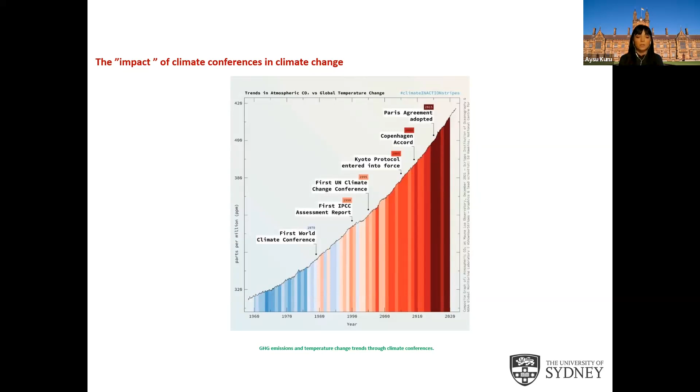The climate conferences held since 1979 seem not to have helped that much, including the Paris Agreement, in which many countries agreed to limit global warming to 2 degrees Celsius.

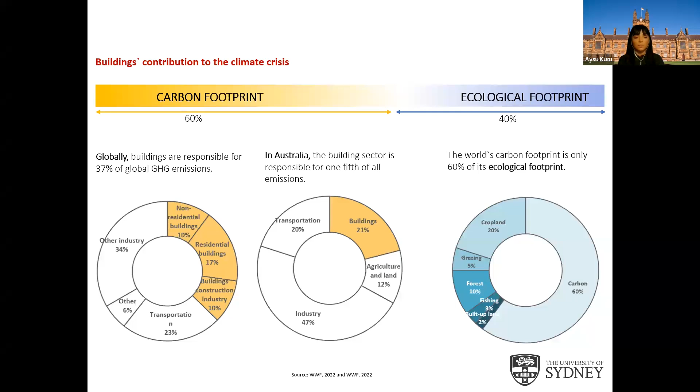Australia is identified as one of the most vulnerable developed nations to climate change. There is increasing evidence of climate change interacting with underlying natural variability and resulting in substantial increases in the frequency and intensity of extreme weather events, as we all have experienced in Australia.

However, there is an opportunity rising from this problem, and that is the transition to a net zero carbon economy. Australia has the capacity in terms of technology and available land to not only transition to, but become a world leader in a zero carbon economy.

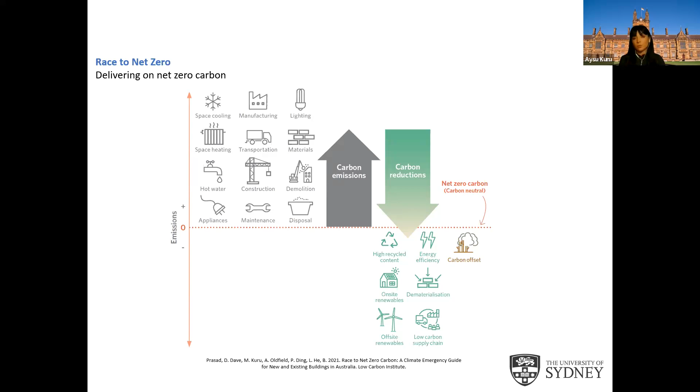We mapped the potential of carbon reducing strategies in various building types and the potential for generating renewable energy to offset operational carbon to reach net zero operational carbon performance. We set a net zero target for 2030 in alignment with the urgency that climate change requires.

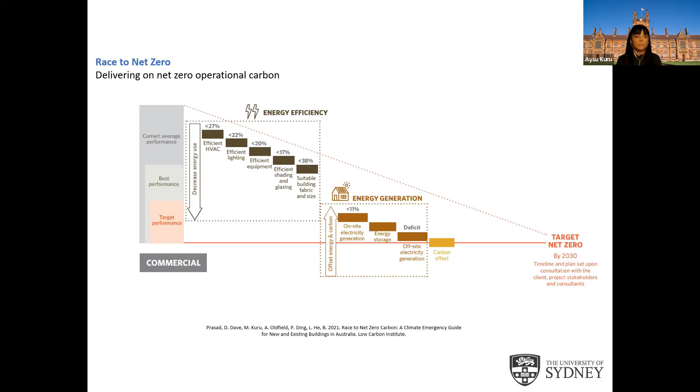First, do not build, and if that's not an option, adaptive reuse may be one. Second, build less and dematerialize. Third, build smarter and optimize. Fourth, use low carbon supply chains.

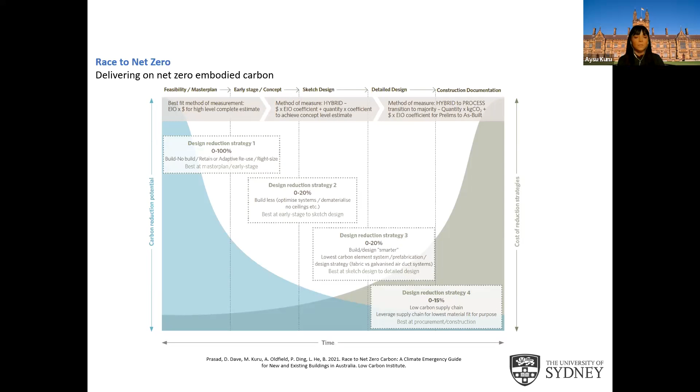Based on our calculations for the Australian building sector to reach net zero by 2050, operational carbon can be net zero by 2030 and embodied carbon by 2040 for new buildings. Existing buildings can achieve net zero carbon performance by 2050 altogether.

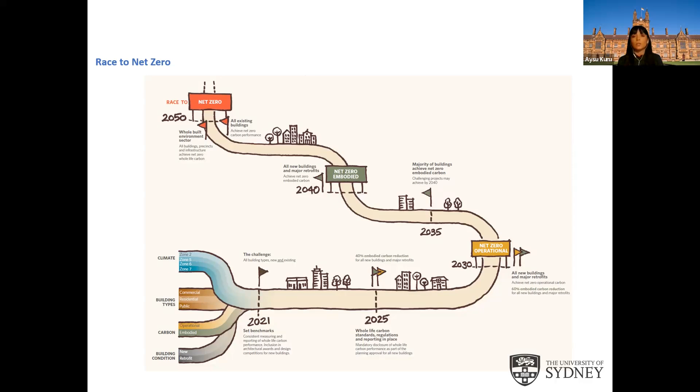Now I'd like to move on to a second research-driven project called Ecoactive Building Envelopes. Ecoactive building envelopes is an innovative concept of designing building envelopes that give back to the natural ecosystems that they're a part of. So they do not only offset their emissions, but they give more than they take from the environment. As such, they're also named negative emission technologies.

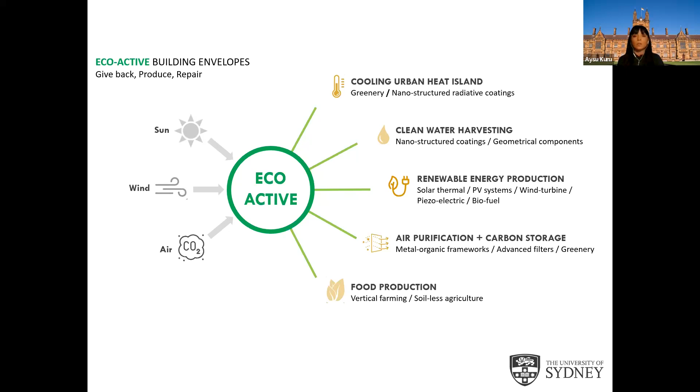In particular, the nanotechnologies included in the one-to-one scale prototype are atmospheric carbon capture, algae bioreactors, and nanotech photovoltaics.

The carbon capture technology captures carbon from the air. This is an important technology because it helps to get rid of the carbon dioxide that is already in the atmosphere. This is known as carbon sequestration that trees do, but with carbon capturing nanotech, we can do the same in a rapid fashion in support of living things absorbing carbon dioxide. Think of this as making buildings carbon sinks.

We couple the carbon capturing nanotech in our prototype with an algae bioreactor. An algae bioreactor is essentially a transparent system that can be implemented on the facade. Algae is a living system and it needs carbon dioxide to survive. The carbon captured by the nanotech in our prototype is then given to the algae to be turned into oxygen by the algae. So the prototype is a negative emission closed loop system.

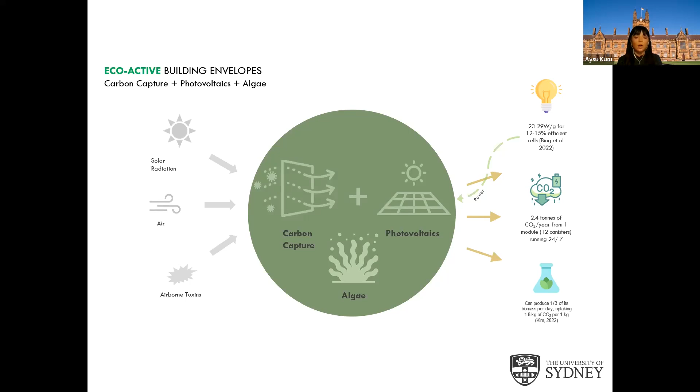There also is a photovoltaic system helping generate green electricity within the prototype to offset the energy used for the carbon capturing nanotech technology.

Well, that's enough talking technical. Now we'll zoom out and talk about climate action to tackle climate change.

The Australian and state governments are on track to reach net zero emissions by 2050. Some states have already achieved this, and some have more ambitious targets than the federal government. But what matters is that Australia is aware and committing to make an impact.

We've talked a bit about climate conferences, but not mentioned the biodiversity conference. Similar to the climate change Conference of Parties, which stands for COP, there is the Biodiversity Conference of Parties, or Biodiversity COP. The last one was held in December 2022 with a significant outcome, something like the Paris Agreement of Biodiversity, at COP15.

More than 190 countries committed to reverse nature destruction by 2030. In doing so, they committed to protect 30% of land globally. Australia committed to this pledge too, not necessarily protecting land at home, but globally altogether. Hopefully this will be followed by national action to protect land at home too.

Where I work, the University of Sydney is committed to take action on climate as well. I find it motivating to give you some insight into the University of Sydney sustainability strategy in the hopes that it can inspire other organisations like where you may be practicing.

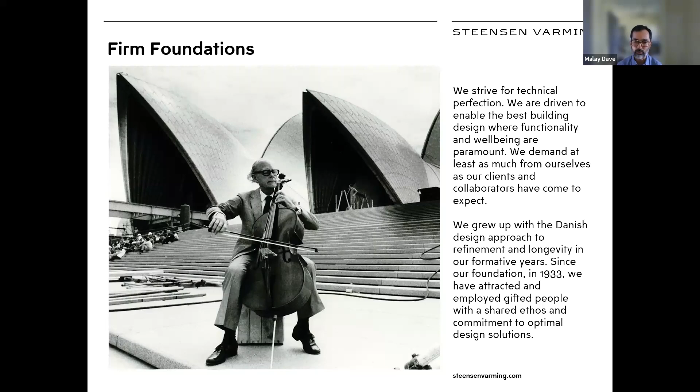In terms of environmental sustainability and commitment to climate and society, we have been early adopters and early signatories of the United Nations Global Compact. This includes 10 principles divided into 4 key categories, covering human rights, labor, environment, and anti-corruption.

We have expanded our attempt for positive impact beyond this. Recently, we have been assessed on the B Corp assessment. B Corp stands for Benefit Corporation, where organizations' actions in their day-to-day operation provide beneficial contribution to the environment and society at large.

We were very pleased to find that our overall B Impact score was 104. 50 is the median score for ordinary businesses, and 80 is the minimum score to be eligible for B Corp certification. This was our first attempt, and we will continue to work on enhancing and expanding our reach in 5 key categories, which are rigorously assessed and independently verified through B Corporation. These 5 categories are governance, workers, community, environment, and customers.

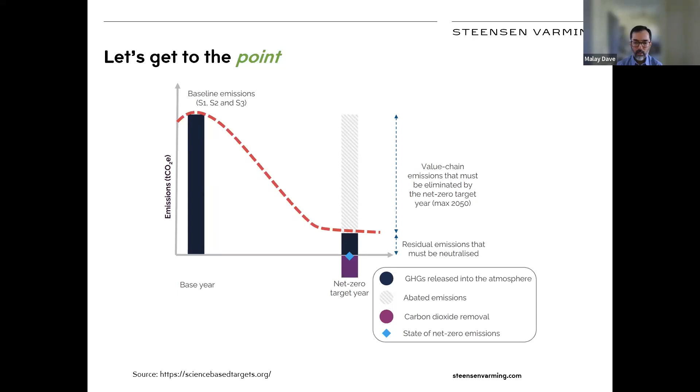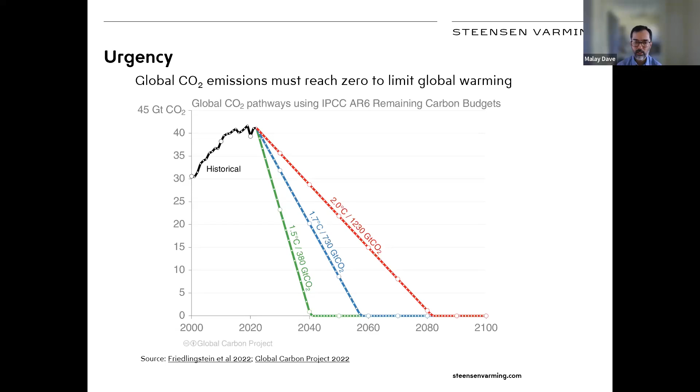This is based on our current understanding. The Global Carbon Project recently released their paper on the remaining carbon budget, based on the latest IPCC report. They demonstrate that we have 3 distinct pathways possible for that reduction to occur. If we were to stick with 1.5 degrees reduction, as per the Paris Climate Agreement, that reduction may need to be substantially more rapid and acute than previously understood. This presents an enormous challenge, but something we have the capacity and technology to deal with right now.

I would like to start the second part of my presentation in this context with a question raised by one master long time ago. Le Corbusier asked, "It is a question of building which is at the root of the social unrest of today, architecture or revolution?" If the master was today to see the climate emergency we are dealing with, he might say it is a question of building which is at the root of the climate emergency today. What do we want to produce, architecture or revolution?

Leading organizations, whether practitioners or industry bodies, are taking a mission approach because of that need for revolution. This is an example of the Green Star Buildings tool from Australia, which has taken a very robust approach for rapid reduction in carbon emission through the building sector. This is the climate positive pathway released as part of the new Green Star Buildings tool.

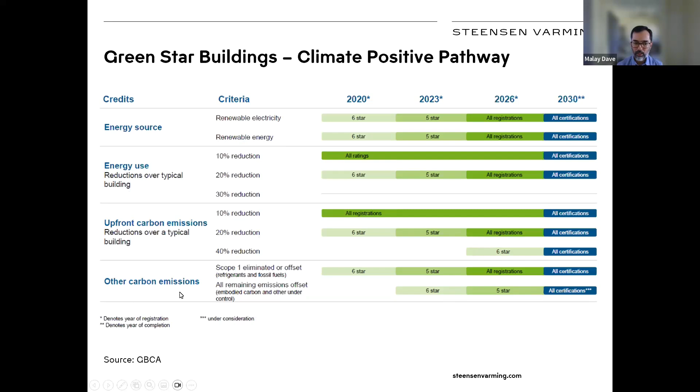This demonstrates the gradual ratcheting up of stringency levels for Australian buildings. From 2020 up to 2030, increasingly at every 3 years, buildings are required to improve their performance through minimum performance stringency increases across 4 key categories essential for the climate positive pathway: energy source, energy use, upfront carbon emissions, and other carbon emissions not captured anywhere else.

Presenting one case study that we are working on right now, which has also taken a similar approach. This is the Melbourne Arts Precinct transformation project. This is the Yarra River, and on the south side is the Melbourne Arts Precinct. There are existing buildings: Hamer Hall, the Theatres Building, and the National Gallery of Victoria International. There is also a proposed building we are working on in parallel, National Gallery of Victoria Contemporary, or NGVC.

It is very interesting to work on a project that has scope for both a precinct and individual buildings. It provides enormous opportunity for achieving sustainability and high performance across different services and categories. It also presents several challenges of interface and complexity, how to deal with performance assessment and delivering that high performance.

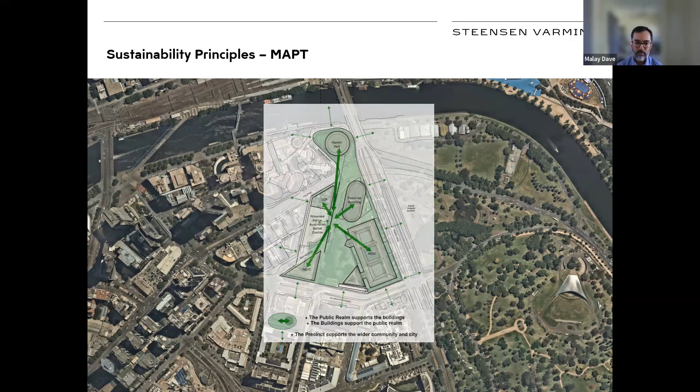What we started with was setting up an overarching sustainability strategy matrix. Across 10 different categories, we looked at various strategies, and as the project progresses through different stages, what strategies would apply and why. We considered sustainability management, site and environment, planning and microclimate, health and well-being, energy, water demand, transport, materials and waste, community and economy, and smart tech and infrastructure.

We looked at high-level aspirations for the entire precinct and what that meant in terms of strategies. What would we consider at concept and master plan level or detailed design level? Infrastructure versus building design strategies, as well as after construction completion, what would be the ongoing strategies for future phases for operation and post-occupancy?

This shows that sustainability and climate emergency were taken quite seriously and applied quite comprehensively. Without going into much detail on all the different categories, I would like to focus on the key aspiration of the project, which is aiming for zero.

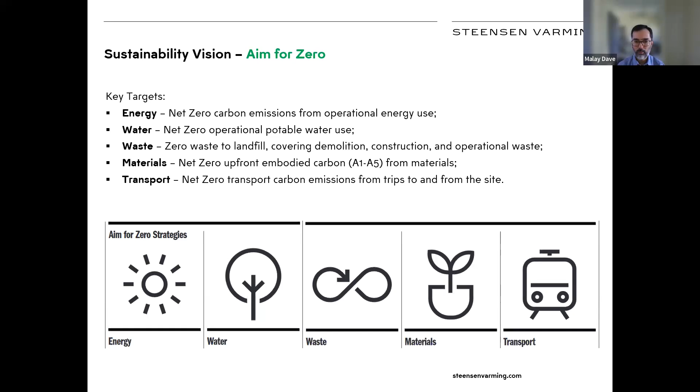5 categories were tackled in this aspiration: net zero carbon emissions from operational energy use; net zero operational water demand, reduction in terms of potable water; waste reduction to zero, or waste diversion from landfill, which would include demolition, construction, and operational waste. In terms of materials, in addition to responsible materials specification and environmental or human toxicity issues, we strongly focused on embodied carbon through A1 to A5 scope, which is upfront embodied carbon from materials; and transport, in terms of net zero transport emissions from trips to and from this site.

An optimized network would be critical for a project like this, which has to deal with both precinct demands as well as individual building demands. A similar hierarchical approach was adopted for waste, water, transport, and a circular economy approach for material selection and construction methodology application.

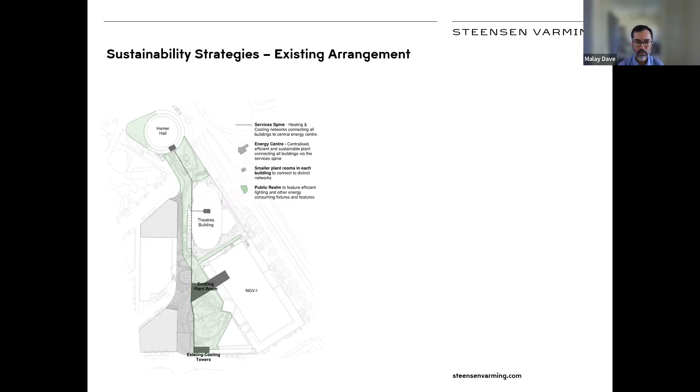The precinct design is being led by Hassell and a team of expert consultants, and we are leading, among other services, sustainability as well.

What was proposed was a centralized system instead of a decentralized system for various benefits. Key benefits were energy sharing, improved redundancy and resilience of the entire system, possibility of future upgrades and maintenance, improving sustainability of the whole site as well as individual buildings in one integrated system, and the possibility of future improvement as well as eligibility of any grants available for renewable and district energy implementation.

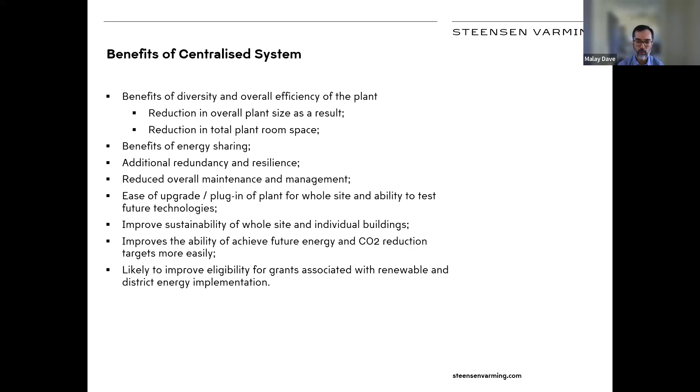What was considered was an integrated resource management, considering both energy and waste and water. Here we are looking at two key resources, energy and water. What will be available on site and what will be imported was considered. Vertically, you can see there are categories of generation mechanisms that leverage this resource availability. There would be passive opportunities.

What products would be required and processes will be engaged, and what would be the eventual output through each of those categories, and what would be the interaction across all these different systems, and how that integration will need to be included in design decision making, was considered as a team.

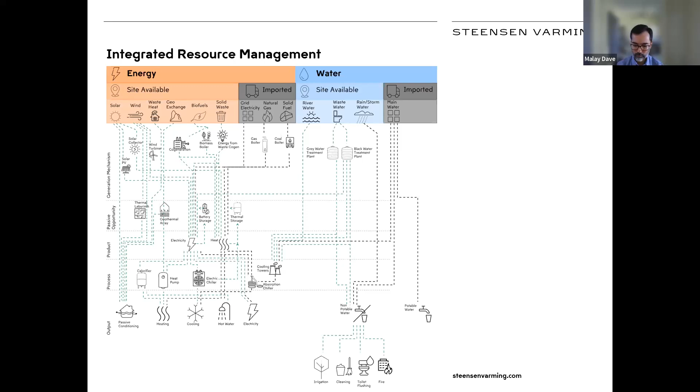There are ESG performance levels and priorities considered, both in terms of resource efficiency of energy, water, and waste. Benefits to the community and ecology at large was considered. Resilience and redundancy aspects were considered as well. And in terms of practicality, cost, payback time, spatial implementation, and of course, disruption to a prominent site like this was also considered. Each strategy was assessed and given a score, and then that helped us compare all strategies with each other.

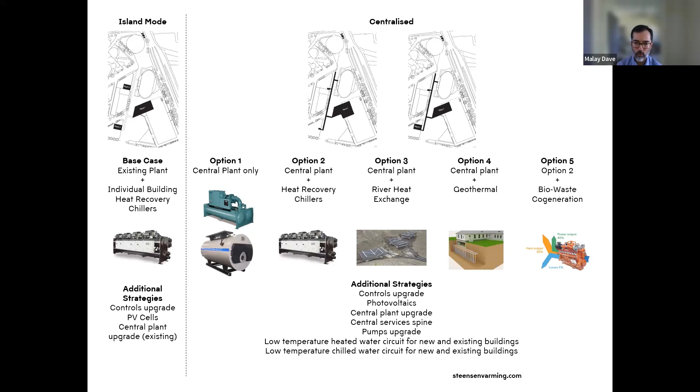To the right-hand side, we see five different options, and each of those options were considered on those criteria previously mentioned. Through that assessment, in that early design stage, we were able to demonstrate that option five was able to provide significant benefit. Although this is a snapshot of a work in progress, and further considerations subsequently were taken into consideration, and the design process is still ongoing.

However, this shows the method through which a decision-making process can be undertaken on a complex project like this. What was also considered was each option was compared based on four different other categories. Energy consumption for heating and cooling was compared for all those six options, or five options compared with one base case. Resultant carbon emissions from cooling and heating system was also compared. Water consumption for cooling was compared, and the net present value over 30 years.

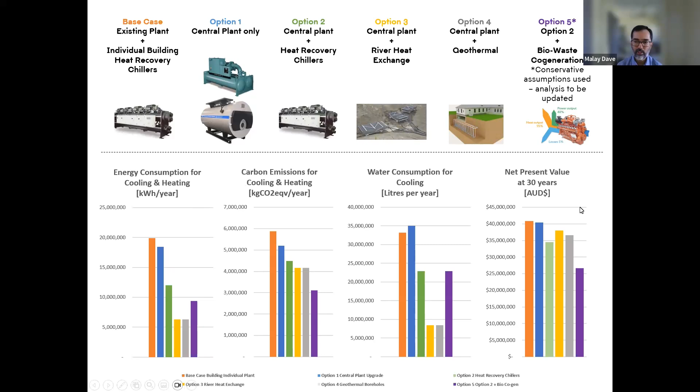Based on this assessment, a centralized system through a centralized services corridor was proposed and is being considered for implementation. As you can see in this diagram, the existing street was elevated for a community garden landscape portal, under which there is a whole services corridor that runs and houses the services spine. There is an energy center that will likely be moved into the new building, NGVC, that drives this entire energy system for this entire precinct.

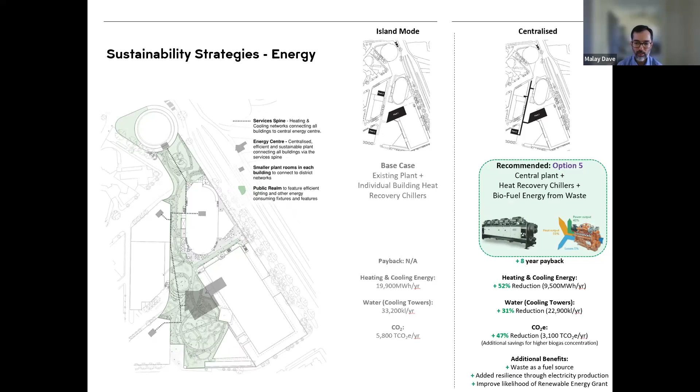Through this design and the options considered, it was found that the project was able to potentially achieve a 52% reduction in heating cooling energy demand, 31% water reduction, and 47% reduction in CO2 emissions. There are other benefits also identified and further being considered.

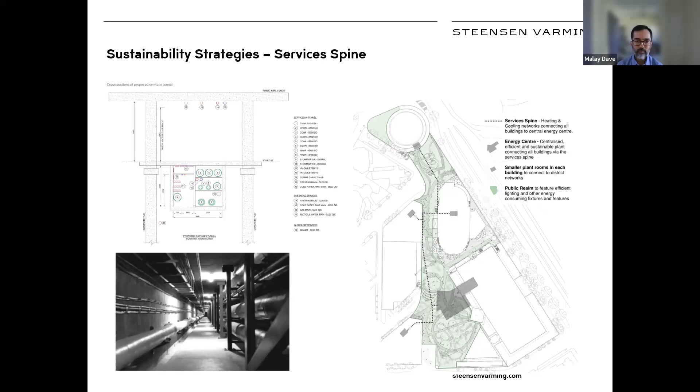This is the services spine that I just mentioned about. Similar exercises are taken on all 5 categories: energy, water, waste, materials, and transport, and reduction potential was quantified. That quantification also was considered on individual buildings within the precinct, as well as through public realm in between those buildings. The project is still being designed, so this is a work in progress and will be further refined, fine-tuned, and optimized for improving this reduction potential.

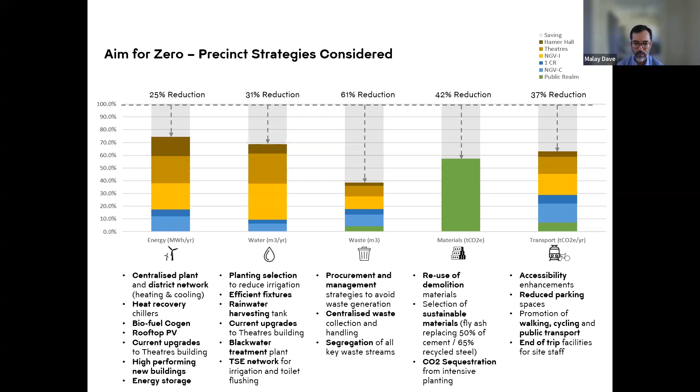We also considered future climate impacts in that modeling, and we'll continue to model this in collaboration with other services consultants. I'm mindful that there is a dedicated presentation on resilience upcoming next month, so I will leave this particular aspect just here.

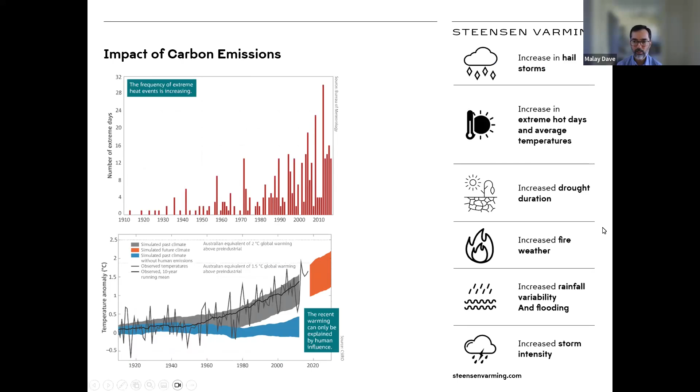NGVC, National Gallery of Victoria Contemporary, is the flagship sustainability project that will lead the sustainability of this entire precinct. At this stage, I'm not able to share a lot of the information of this project. Hopefully in the future, I may be able to. But it is safe to say that this project is going to lead sustainability through its architectural design and innovative systems that are being implemented.

Aim for zero and the carbon neutral, climate active carbon neutral certification that applies to the entire precinct will also be driven by the high performance of NGV Contemporary.

In summary, we found a few lessons were very important to understand and share. One of the key ones is to acknowledge the complexity of a precinct project and how that interacts with individual buildings on site, whether existing or being proposed.

It's important to understand individual needs and how they might need to be optimized, not just for now, but for future climate. Stakeholder engagement, not just beyond to the community and government bodies and clients, but also within the project teams and in between project teams, between architects and sustainability consultants and services engineers and so on, is critical for a project to tackle all the risks associated with projects like this.

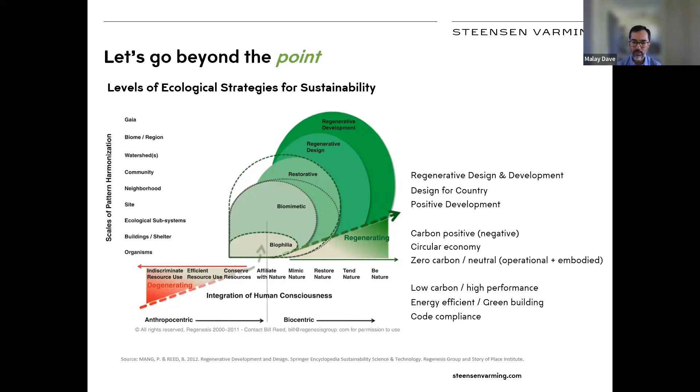We need to ponder this question, because it will take us to the point of net zero, or sustainability as conventionally understood. But it's critical we go beyond that point, continuing to push from efficiency to sufficiency, beyond the delicate, accounting-based fragile net zero point, into the realm of resilience, restorative and regenerative design and development. That's where the future for our projects lies, with increased responsibility for addressing the climate emergency at the rapid rate it demands.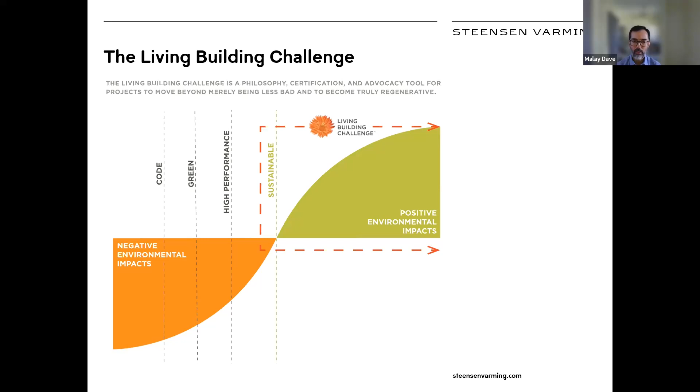The Living Building Challenge is a globally recognized, one of the highest, if not the highest, stringency building assessment framework. It takes the same idea of not focusing on negative environmental impact, but on positive environmental impact, going beyond zero, not limiting ourselves to doing less bad.

It asks profound questions like, what does good look like? Two words are important here: good and look. We need to define what that means—good in terms of climate emergency, sustainability, society, and regeneration of the whole system. We can also ask, what does good feel like? Can we ask these questions on each of our projects?

The Living Building Challenge also asks other interesting questions—not closed-ended questions that lead to an answer or fact, but ones that make us think and lead us beyond that point. It asks, what if every single act of design and construction made the world a better place?

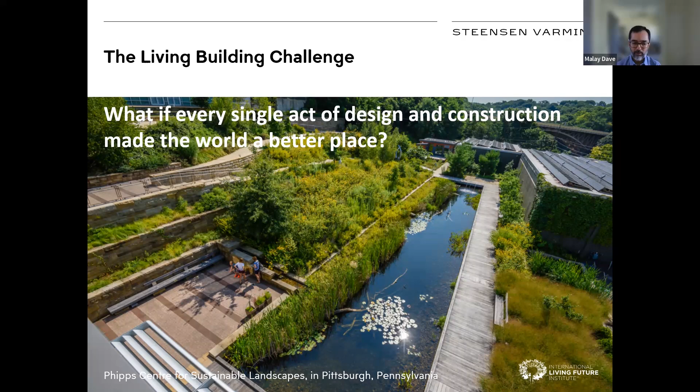Projects like what you can see here, Phipps Centre for Sustainable Landscapes, which is a Living Certified project, demonstrate what is possible.

One such project I've had the privilege to be involved with is Narara Eco Village. It's a community project aimed at nurturing a resilient and inclusive intergenerational community focused on regenerative environmental, social, and economic practices.

This is just one hour north of Sydney. The project includes 64 hectares of land. Two-thirds of it will be retained for conservation, less than one-third used for development including agriculture, bush regeneration, food co-ops and other activities, and even less for housing, with a maximum of 100 houses in two stages at this stage.

All houses are required to be minimum 7.5 star rating in Stage 2. Stage 1, just completed, required minimum 7-star rating, already beyond the minimum required by the National Construction Code, which is 6 stars. The completed houses, more than 50, average 7.7 stars.

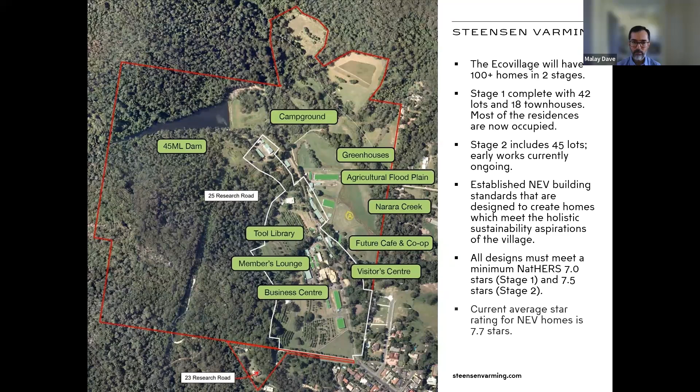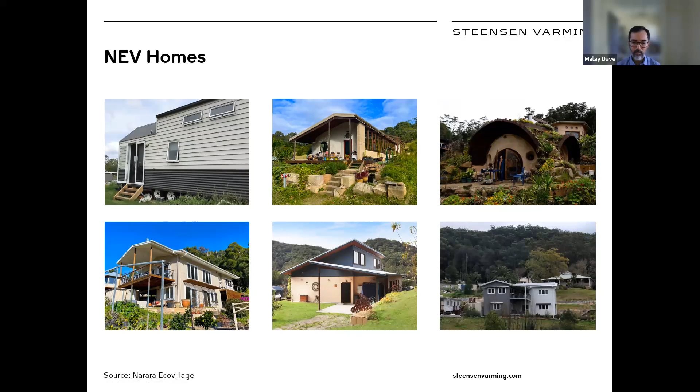So these are the homes. Each home is required to have a minimum 4 kilowatt PV system. In total, the village has 350 kilowatt installed power capacity. The village has a smart grid with a 437 kilowatt hour community battery. This has been developed with funding and support from the New South Wales government and ARENA. The entire community aspires to offset all its embodied carbon within the next 30 years.

All homes are estimated to require 60% less heating and cooling than the average in the Central Coast region of New South Wales. At the moment, the entire Narara Eco Village exports at least seven times the amount of energy it imports from the grid. So in terms of operational energy, it is seven times positive.

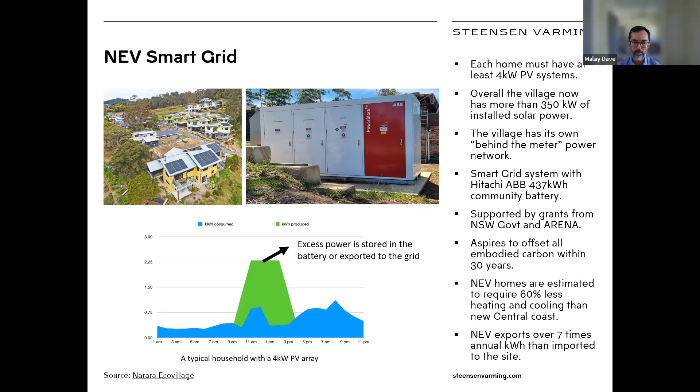The grid provides its energy demand reduction as well as demand management, optimization and stability. Over the last year we have monitored its performance, and found that only during peak winter was the community reliant on importing electricity from the grid, and only a small fraction. The rest of the time it was exporting. 88% of the time, this community was energy self-sufficient.

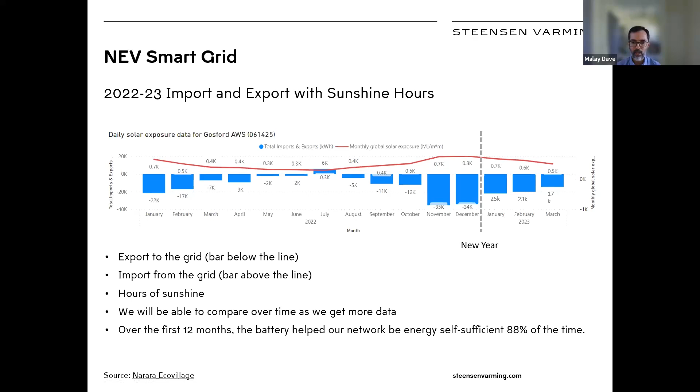Beyond energy and emissions, there is a lot of bush regeneration and other regenerative activities happening in this community. That leads me to my last slide, sharing with you the last question that makes us ponder.

Thank you so much for those presentations. They were brilliant, Aysu and Malay.

We might run through a few questions that have come through from the audience. The first one is in relation to the grid and what happens after the point when it becomes 100% green or powered by renewable energy, and what does that mean for buildings with on-site renewables that are relying on those offsets to achieve net zero?